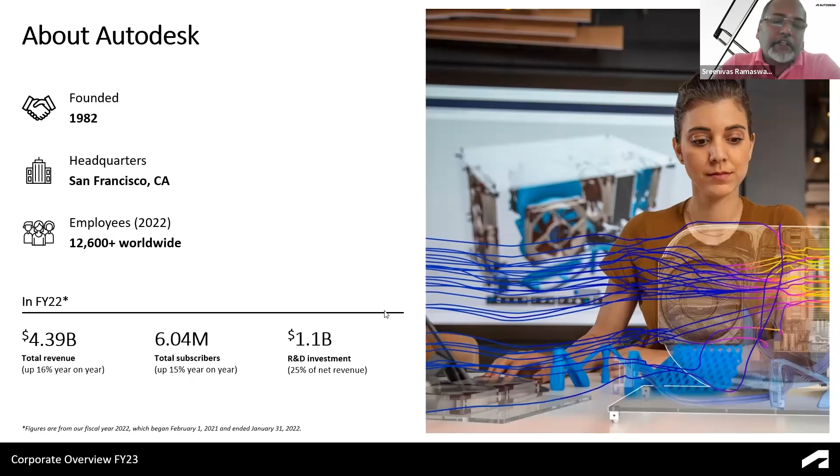Next slide. So we have the broadest, most comprehensive, best-in-class manufacturing solutions available today, and our customers are benefiting from the expertise. We have 700 software developers plus our expert technical consulting teams and growing specialized partner networks across the globe. We have invested more than $1 billion to build advanced manufacturing solutions. And we have 6 technology centers worldwide focused on advanced manufacturing innovation. Next slide, Sai.

Our network brings together industry, academic, and entrepreneurial communities to create a shared vision of the future of making. Autodesk provides these facilities, technology, training and expertise for these communities to explore ideas that will shape the future. We also invite customers to come and visit these technology centers and learn more about the future of making. Next slide.

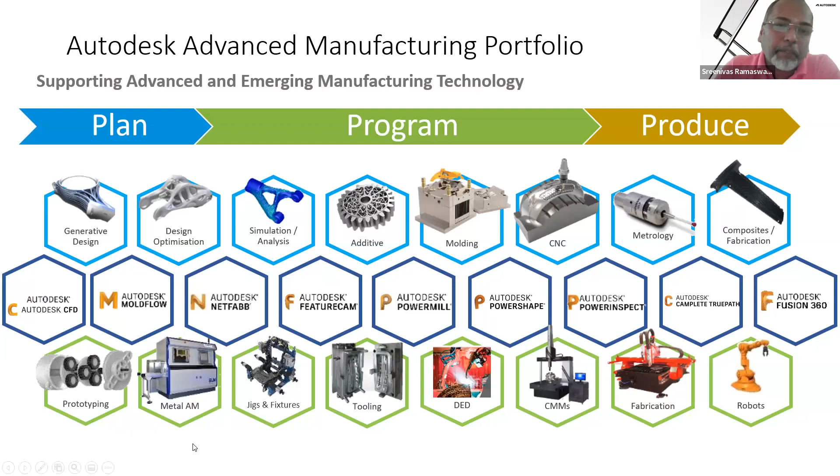Next slide. Thank you. Let's now look at the current manufacturing challenges faced by the industries, which will help to introspect what a manufacturer has to face in this fast changing environment. Due to the increased customer demands, the rate of new product introduction is skyrocketing. About 45% of them are delayed by at least 1 month. This is a study done by Gartner, and it's been put in the news. So 45% of the new products that come into market are delayed by at least 1 month.

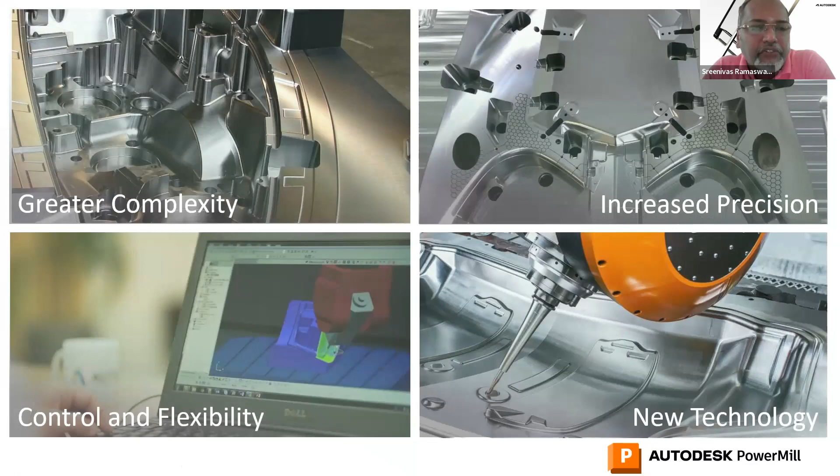Why is this so? Why is there a delay? So let's deep dive further and see how manufacturing is affecting this delay. Next slide, Sai. So what are the common challenges faced by the manufacturing industries, or at large as a manufacturer? What are the challenges that we face today?

Greater complexity. Suppliers of consumer goods strive to differentiate their products in a highly competitive marketplace. Consumers have grown to expect new and better parts more frequently, and end users expect products that are stylish, connected, desirable, life-enriching, customizable, reliable, convenient. And this places ever-increasing pressure on the capabilities of manufacturers to react and remain ahead on product designs. Parts cannot be half-made, and so CAM needs to provide tools to get the job done.

Increased precision. Customers' expectations regarding quality are higher than ever. Manufacturers need to maintain extreme levels of standards of quality and precision. Dimensional precision and surface finish are paramount nowadays. Manual polishing is not acceptable at all.

Control and flexibility. Manufacturers are under pressure to make every second count. Inefficient machining processes containing air cutting waste time and money and place additional pressure on delivery timelines. Component manufacturers need to be agile to react to design changes.

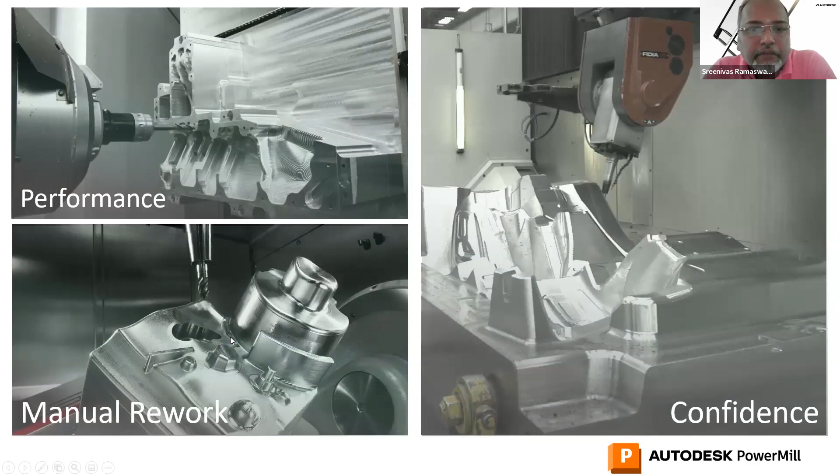Next slide, Sai. So the other common challenges that we face today are performance. Large complex parts take time to program, with pressure to start cutting chips as quickly as possible. Speed cannot be the only consideration. Speed and quality must go hand in hand. CAM software must provide the tools to shorten programming time without sacrificing quality.

Manual rework. Parts are both complex in nature and large in nature. So as a result, any rework is expensive and time consuming and will impact delivery timelines. Manual polishing is costly, inconsistent, and can destroy the precision of the required part.

And the last one that I want to talk about is confidence. Complex parts are inherently harder to manufacture. Manufacturers are under pressure to produce high quality, reliable NC code. Programming errors need to be found and resolved as early as possible in the process. Programming errors can be disastrous, resulting not only in huge damage to and rejection of parts, but also damage to the workpiece, fixturing, and the CNC machine as a whole. So it's a lot of downtime as well as cost to the manufacturing process.

All right. So I'll be talking a little bit about advanced manufacturing solutions. So for nearly 40 years, Autodesk has pushed the possibility of what it means to design and manufacture. So it's not just about design now, it's also about manufacturing. From subtractive, additive, simulation, materials, electronics, Autodesk has it all nowadays. Okay, so let's look at some of the solutions that can help to improve your existing workflow or improve your team's performance in general.

So first of all, let's look at Autodesk PowerMill. PowerMill is a powerful computer-aided manufacturing, or in short, CAM software that is specially designed for 5-axis machines and high-speed machines. This solution is considered the most advanced and complete software for machining complex and hard components, and is fully optimized for 5-axis and high-speed devices.

The main applications of PowerMill are the production of sharp and sensitive parts, such as die casting and molding. Of course, it can be used for others as well, but this is its stronghold. With the help of this solution, you can optimize the toolpaths and improve the surface quality of your components, all digitally, even before you start machining the real prototypes or parts. So you can do the verification all in the digital world.

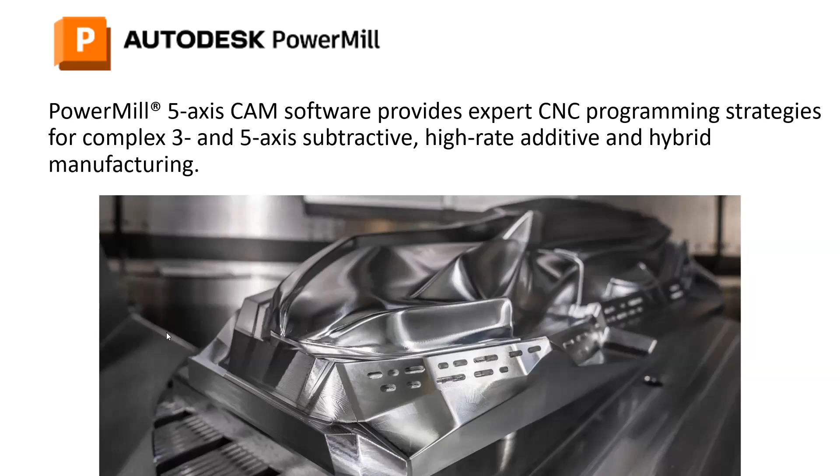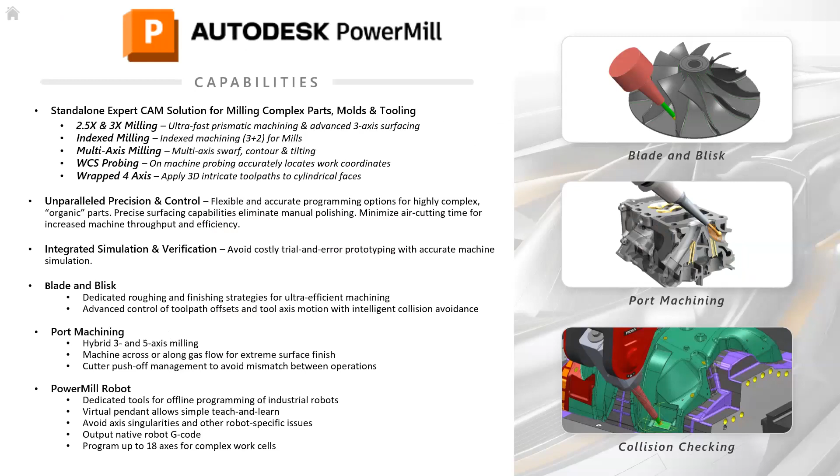All right, so a quick overview of what PowerMill can do. Basically, it's an expert CAM solution, very advanced 2.5 and 3-axis milling, unparalleled precision control, simulation and verification, port machining, and PowerMill robots. So you can even do robot simulations with PowerMill. Okay, let's see a bit more about PowerMill.

No matter whether the parts you manufacture are simple or complex, you probably need more than one machine setup, which can increase time to program the CAM portion. PowerMill gives you predictable behavior, increased automation, and greater flexibility in a familiar interface. When a setup is activated, any toolpaths will be shown automatically on the setup. Work planes are very accessible and user-friendly.

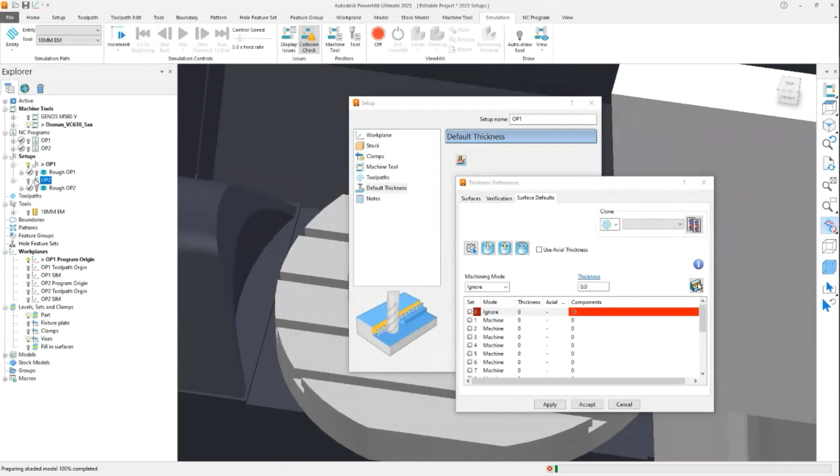We can also add machine tools on the spot for every setup now. You can see the work planes shown on the browser clearly, and you can control the work planes on the spot. Then let's look at things like machine tools. You can specify default thickness for every setup.

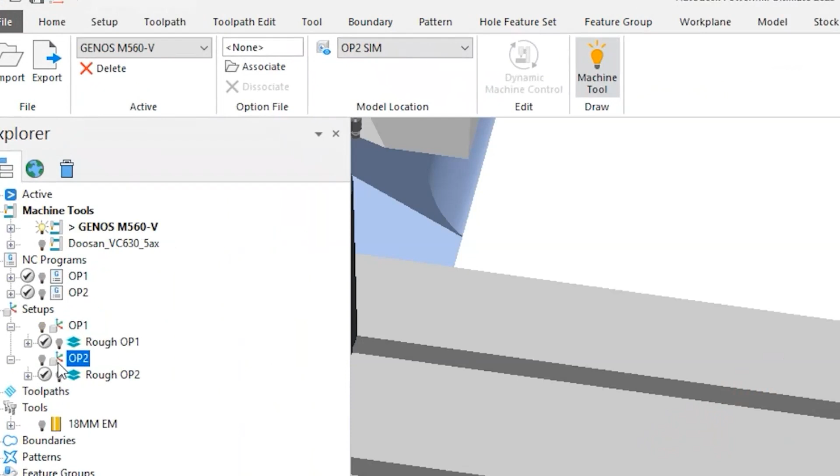And let's talk about the machine tool and model locations. You can assign a different machine tool and model location to each setup. This makes it easier to jump between setups. So with multiple setups, when you want to start to run the program, you can choose it from the dialog box.

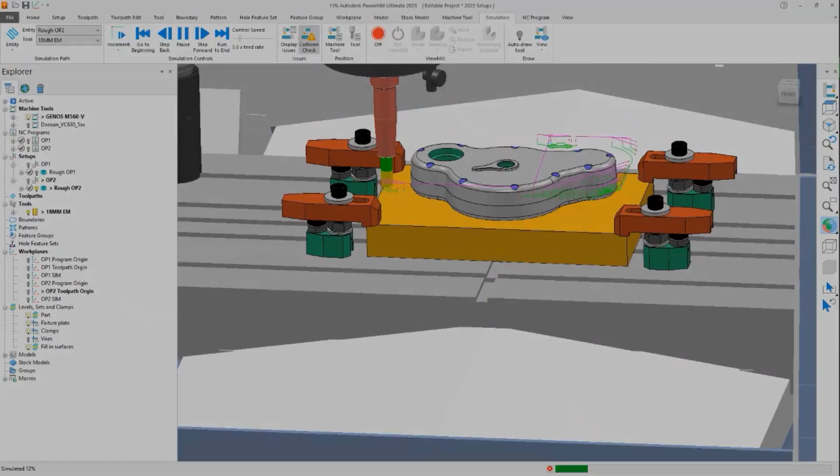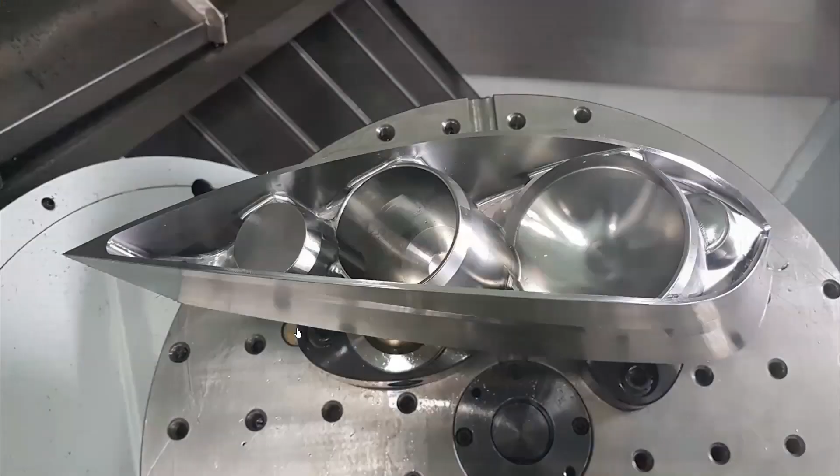So with this, your workflow for programming parts that require multiple setups can be shortened, automated, and simplified. It will help improve your team's performance and your product performance together. Now let's look at some examples. Here is an example of PowerMill with 5-axis. You can import a vise, or create your own vise and bring it into PowerMill.

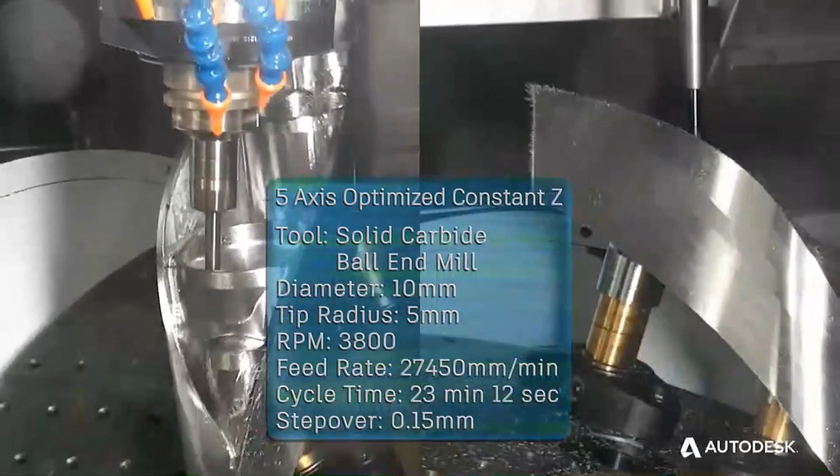Okay, so those are some example videos of how PowerMill helps to machine the product in real life. A quick quote from one of our customers, Paragon D&E: with PowerMill, we're seeing jobs come in weeks ahead of schedule. Builds that traditionally take 10 weeks, we're now doing within 4 to 5 weeks. So in this example, they save more or less half the time to create the programming and machining with PowerMill.

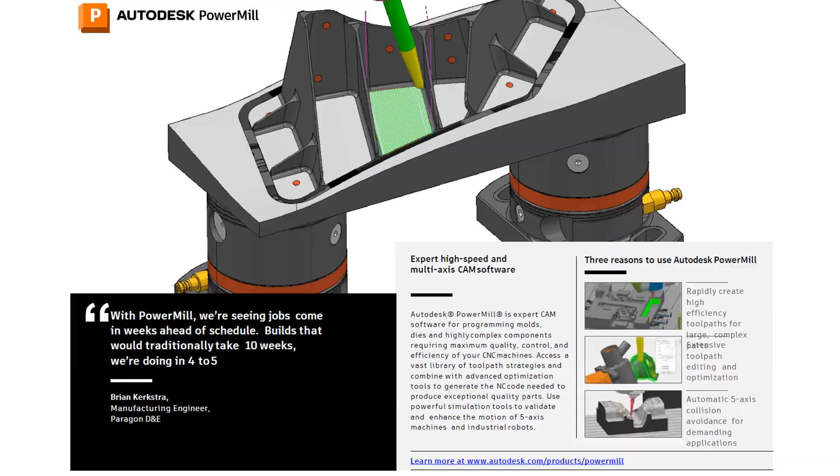Okay, so the three reasons why they use PowerMill: rapidly create high-efficiency toolpaths. And then of course the toolpaths can be edited. Not many solutions have this capability where you can edit the toolpath. And automatic 5-axis collision avoidance to make sure that there's no gouge or any tools hitting the parts or the machines. So next I'm going to share about Autodesk PowerShape.

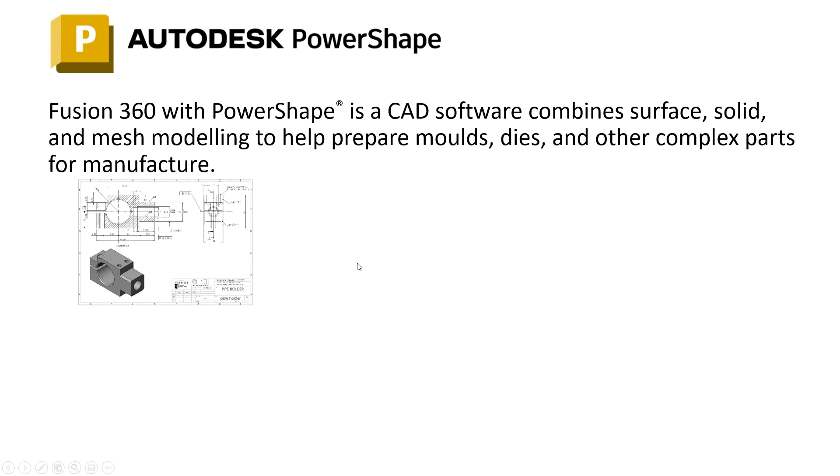PowerShape is an ideal modeling companion for CAM software such as PowerMill, which I shared with you earlier. Basically, it helps to create geometry to aid CAM programming, basically for modeling purposes. PowerShape can work with native CAD data, so it can open CAD data from almost all the mainstream design systems. Intelligent workflows help you to import, analyze, repair, and also prepare complex parts for CNC machining.

PowerShape is commonly used by manufacturers who receive a finished product design and need to convert it into manufacturable parts, often things like molds, tools, dies, and electrodes used for mass production. As you know, in a modeling environment you can model very complicated stuff, but is it manufacturable? So sometimes editing or adjustment is needed to make sure that the part is manufacturable.

Some of the key points of PowerShape: it can repair imported CAD data, so prepare third-party CAD models for manufacture. It can help find and repair common faults with ease with automatic wizards, and auto-detect issues or problems. Tolerant solid modeling: access solid modeling tools designed for real-world manufacturing problems. This helps to quickly make whole-model edits on imperfect data, and it will highlight where the issues or potential issues are.

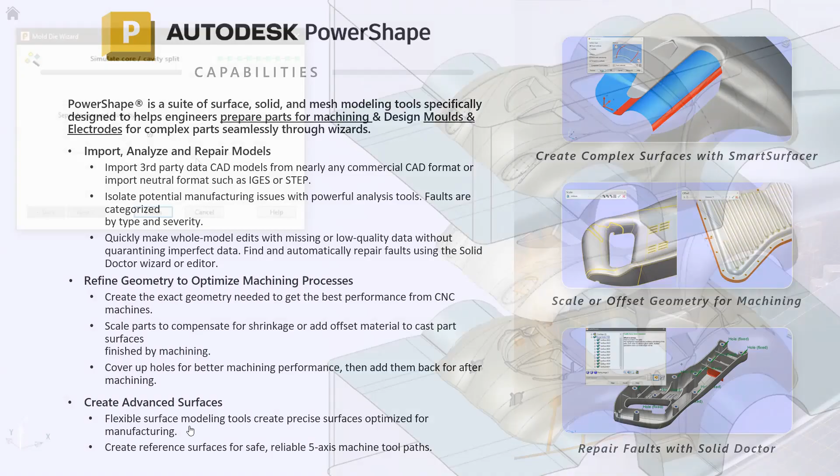Flexible surface modeling. Whenever we produce complex surface geometry, we always need to make sure that we are able to make precise edits to create manufacturing surfaces to our needs, to make sure that it relates back to our requirements and our standards. We can do this with PowerShape as well. So let's just look at some examples.

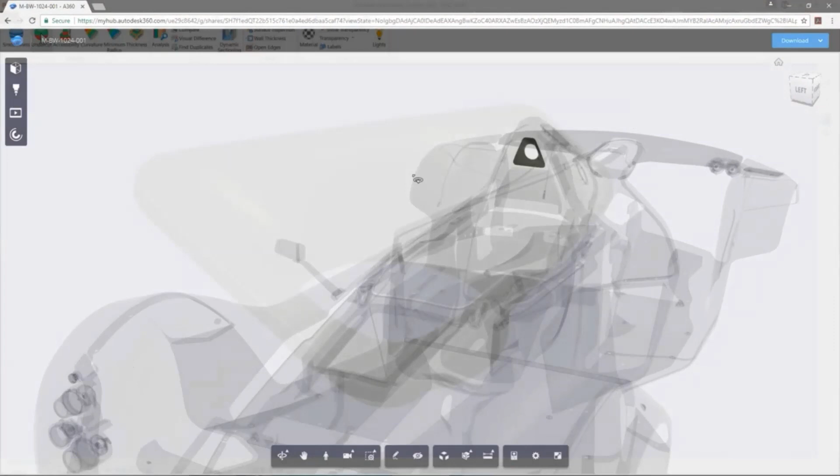PowerShape has a number of dedicated tools to assist with the creation of core and cavity blocks for use in the production of moulds and dies. The first step towards producing a moulded or cast part is to orient the component appropriately. Automotive parts, for example, are designed in car line, their true 3D position as they will be on the finished vehicle. For moulding, parts must be reoriented to allow the tool to open and close in a single direction, known as a line of draw.

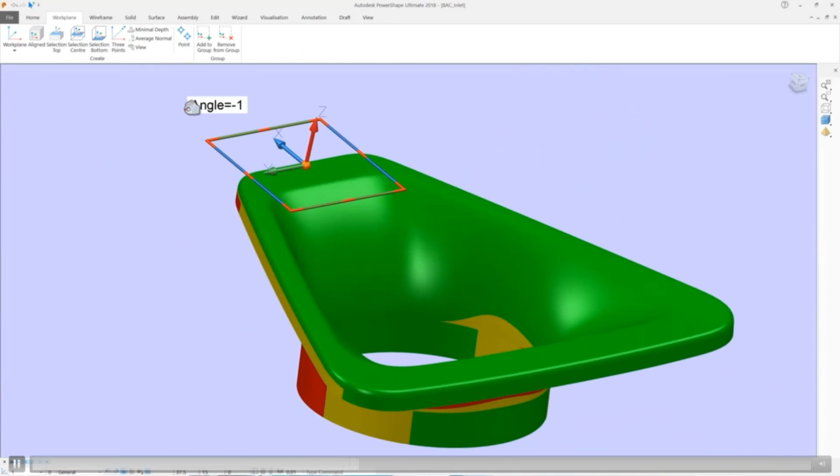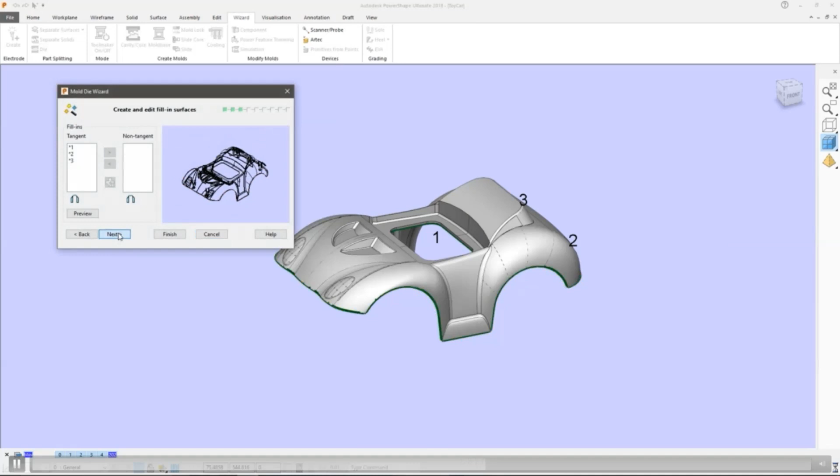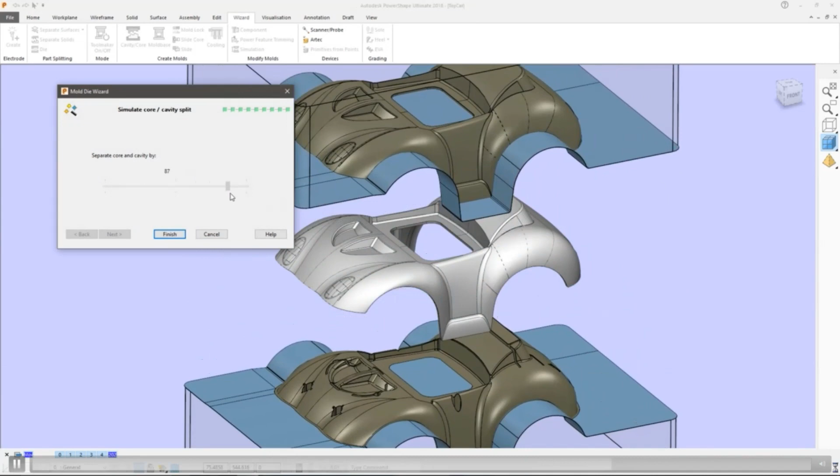PowerShape helps you find the optimum alignment quickly and easily. Use undercut shading to visualize any regions that cannot be moulded. If necessary, adjust the work plane until the undercut features are more easily accessed. For parts that can be moulded in a single line of draw, PowerShape uses a simple-to-follow die wizard. PowerShape automatically splits the part into cavity and core halves, but goes on to create all of the necessary split surfaces to ensure that the tool seals correctly. Die wizard is fast, powerful and extremely flexible. You can start with just the part to be moulded, or predefine split curves, shut-off surfaces, split surfaces, die blocks or any combination, and allow PowerShape to create the missing pieces of geometry.

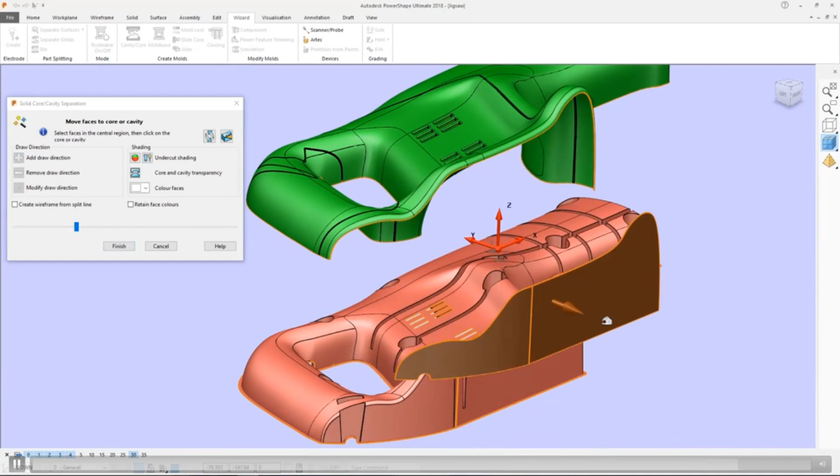Many real-world parts cannot be moulded in a single direction, but instead require complex mechanisms such as slides, lifters, collapsing cores and so on. The core cavity wizard in PowerShape divides a model into as many separate solids as you need. Simple dynamic sliders show you the tool action, helping you ensure that the finished tool will work exactly as you want it.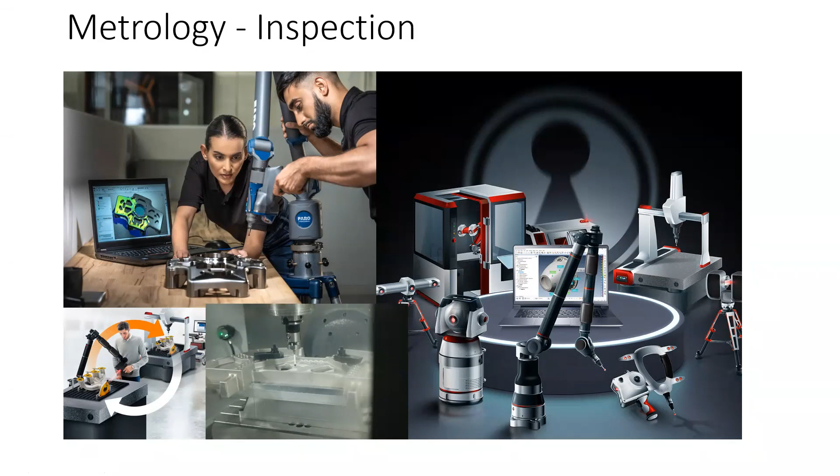All right, so that's on PowerShape. Let's look at something towards inspection, so metrology, the inspection portion of CAM or machining industries. Autodesk PowerInspect: measurement software that offers a powerful way to inspect, validate, and manage quality for all your measurement equipment. It works well with all the portable CMMs like Faro, Kreon, Romer, and a few more.

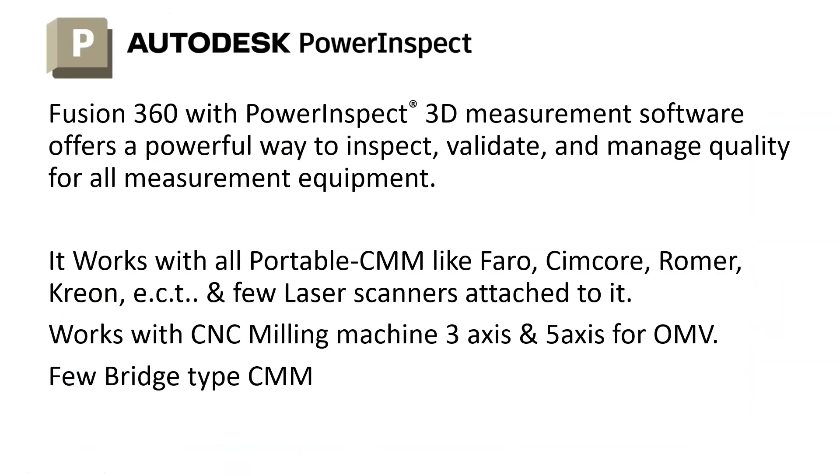Let's look at the capabilities in general. Complex shapes inspection: basically, this is the purpose of using PowerInspect. You want to inspect complex shapes, apply the best strategies for inspecting them, and automatically compile results into reports. Manufacturing integration: optimize your manufacturing with adaptive fixturing, OMV on-machine verification, electrode inspection, clay milling. 2D features from point clouds, where you can automatically fit 2D features from point cloud data and have greater confidence in the measurement results.

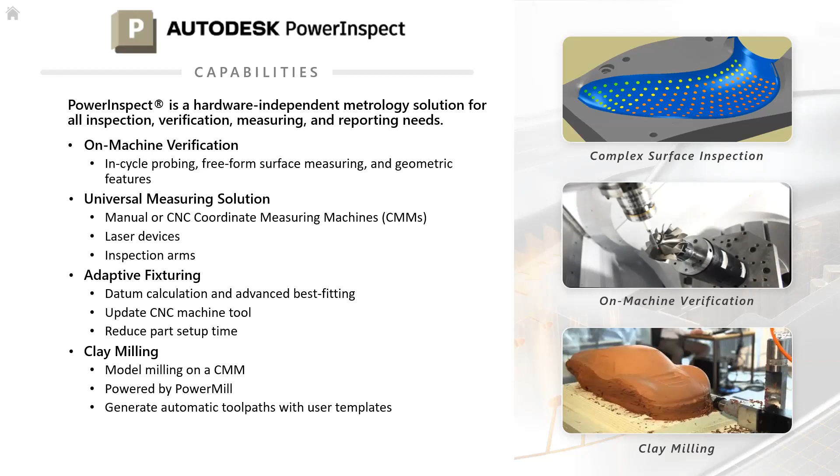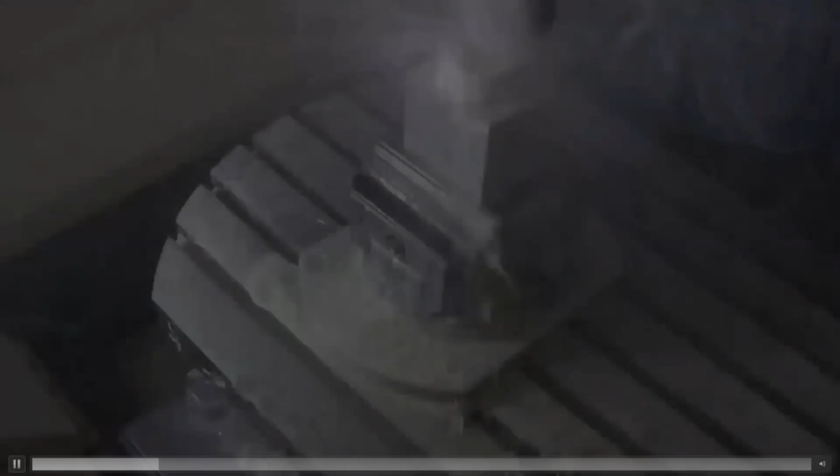Do you require adaptable metrology software capable of smoothly merging with and optimizing your existing workflow? At PowerInspect, we look to complement your overall manufacturing process, however you choose to do things. Our vision is not just for metrology, but to enhance each step of your workflow.

We all understand that time is cost, and so PowerInspect has been built with numerous features and tools that aid in drastically improving the efficiency of your practice, whatever the scale of your project. One of these is a deeply developed alignment tool.

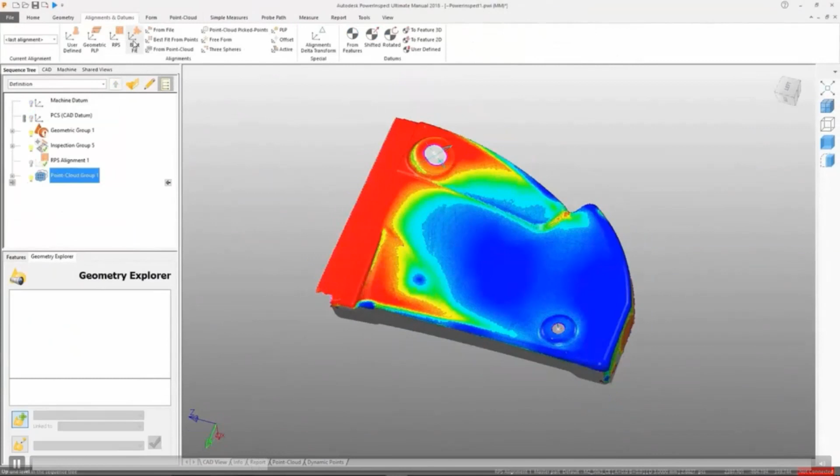This tool consists of a wide array of different alignment methods, making it flexible enough to apply to almost any situation. In particular, PowerInspect's powerful best fit functions allow you to refine your alignment even further, leading to much swifter and more precise overall inspection.

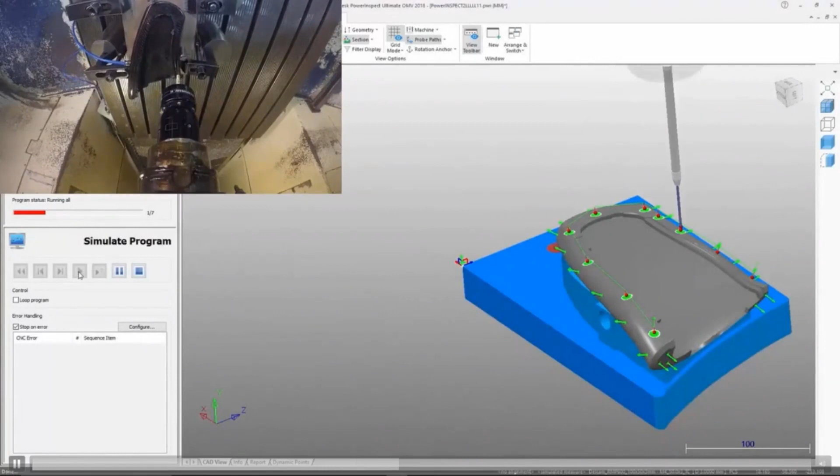PowerInspect also makes small adjustments as it measures, updating future procedures based on the results it obtains. With this feature, named Adaptive Manufacture, inspection can become an integral part of your machining process. With each and every measurement, subsequent toolpaths automatically update and further inspection sequences are modified, leading to unparalleled accuracy at all stages of manufacture.

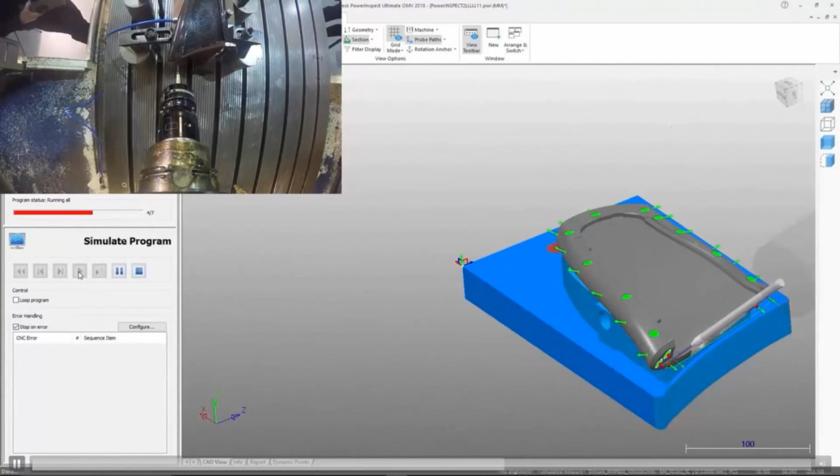But this accuracy could be impaired by any machine you use in your manufacturing procedure. How exactly can you be sure that your machine tool is accurate? PowerInspect can be used to analyze your machines, to ensure they operate exactly the way you want, qualifying any areas of uncertainty before they become a problem.

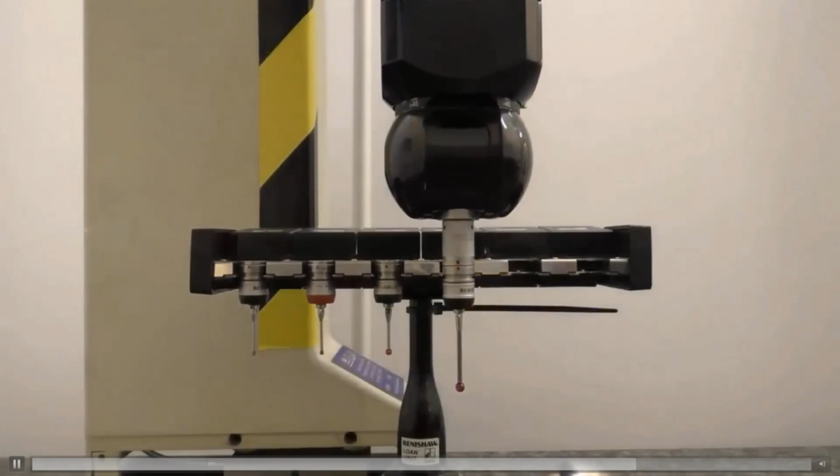At Autodesk, we have a broad range of expertise in a wide array of industries. This experience has proven useful in the construction of our solutions, including PowerInspect. One such industry is electrode manufacture. In an area such as this, where an incredible amount of precision is required, PowerInspect is unrivaled in its prowess. Its peerless ability to measure during each step of the process allows you to compensate for any inaccuracies without excessive expense.

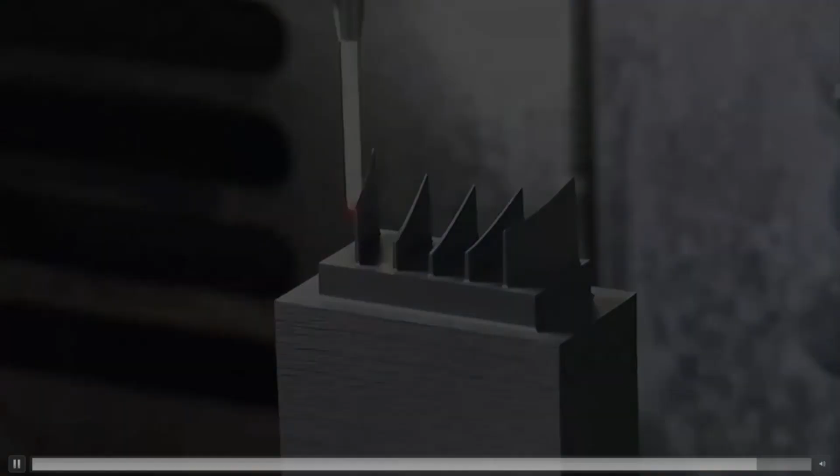No matter what type of engineering you do, PowerInspect can be easily integrated with your workflow, majorly enhancing your manufacturing process.

Okay, so is everyone still okay? All right, so let me just proceed a little bit, not much from my side.

Okay, let's talk about FeatureCam. FeatureCam is a multi-axis turn mill CAM software for 2D, 3D milling and also turning, so mainly used for turn mill.

Let's look at the capabilities of FeatureCam. Basically, it supports a wide variety of machines in job shop environments, including 2.5 to 3-axis milling, indexed milling, turning, EDM, water jets, and laser cuts.

Automated CAM programming with standardized best practice basically helps to program parts faster, because they reduce programming time using automated CAM. This is basically automated CAM, so it has a very good feature called feature recognition, where it's used to scan, identify, and create machinable features from your design.

Comprehensive machine support - can program mills, lathes, turn mills, Swiss lathe, EDMs, and more.

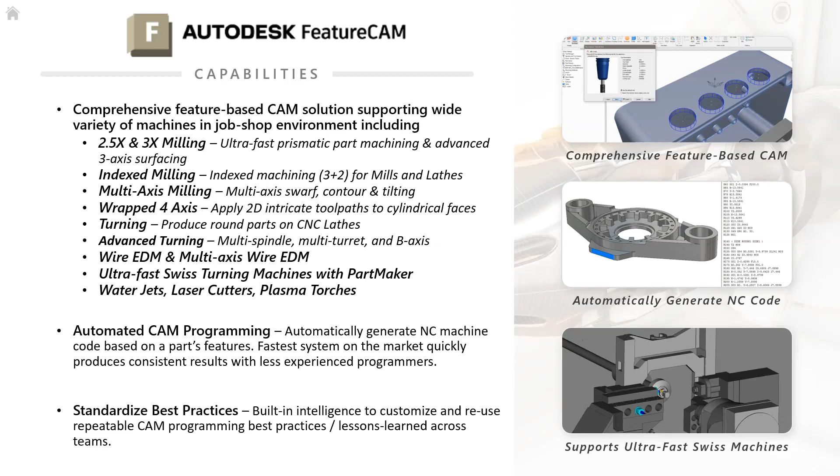So some examples of how people use it - FeatureCam has been a blessing. From the design, they can get the G-code, and it goes into the machine in a very fast, very short time.

So the three main capabilities highlighted are: automate your workflow from design to NC, so this process is shortened; a single interface for all the CNC applications; and consistent results with built-in manufacturing knowledge.

Fusion also can help in terms of collaboration, where it can help do file management, or if you want to share or collaborate with external parties, you can do that, and all the communication can be stored within Fusion 360.

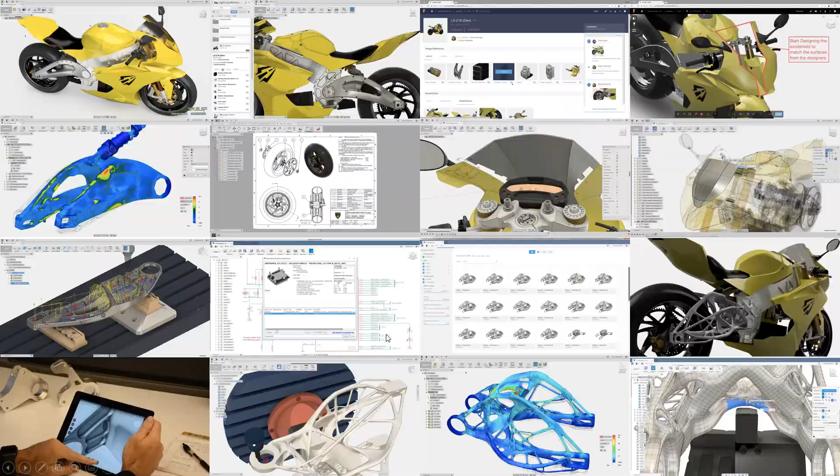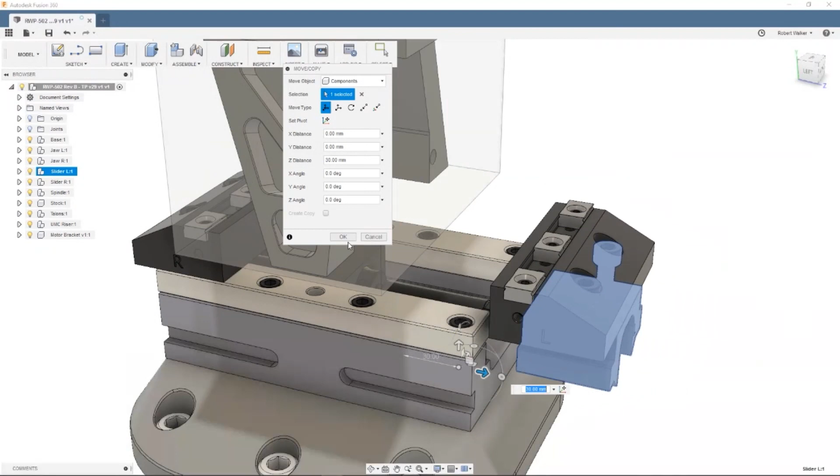With all the powerful assembly and modeling within Fusion, it can be used to establish machining fixtures, and can be fed downstream to PowerMill for machine programming. Any changes to the original SolidWorks file will be immediately reflected in the Fusion file.

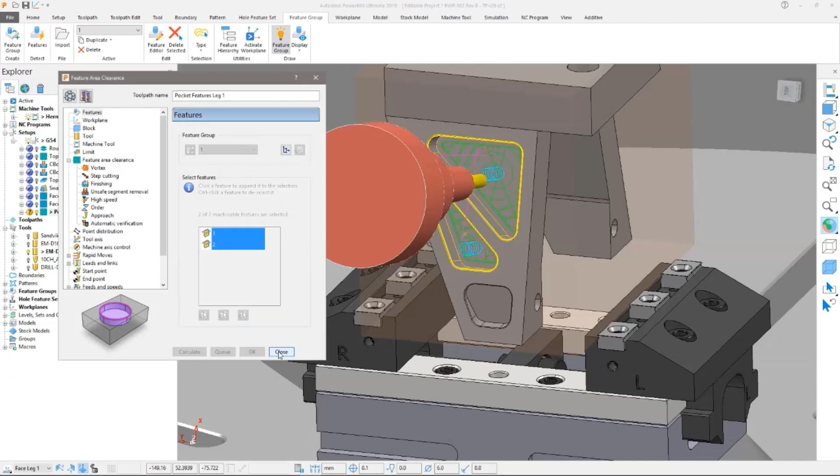And then it can be subsequently passed down to manufacturing, to PowerMill for example. So basically, if there are any updates or changes within SolidWorks, like here you can see some fillets added, with just one button click it automatically updates in Fusion.

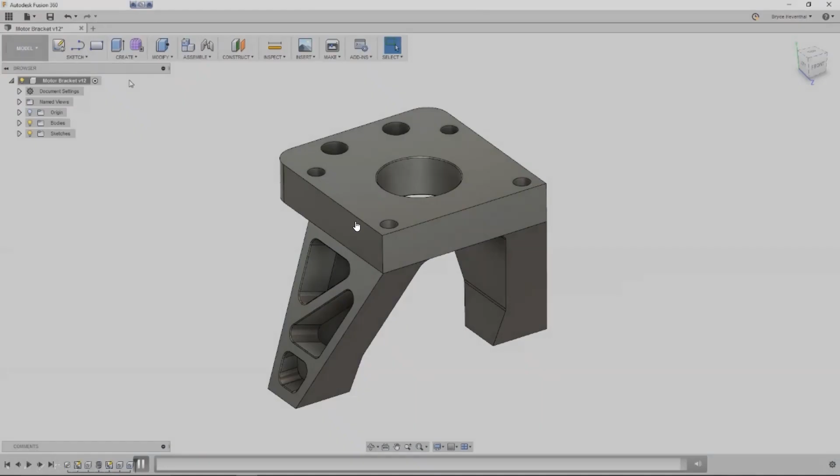All right, so let's say now I'm in PowerMill, and there are some collisions discovered. You can find out there are collisions with the machines or with the tools, and we can do some collaboration or markups within the Fusion team environment.

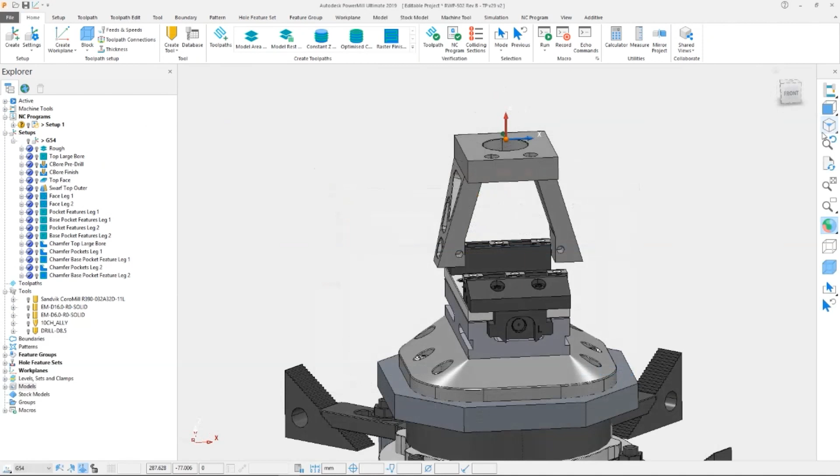This is all in Fusion, and you can do some markups, give some comments. You can document the comment on the right-hand side, and you can see communication is there. So when the file was sent to Fusion or opened up in Fusion, we can make the amendment or adjustment, and then send back, or maybe open it back with PowerMill and straight do the machine program.

So you can see it's re-imported into PowerMill, and simulated in PowerMill to show that everything is well. This is where the collaboration capability of Fusion really helps.

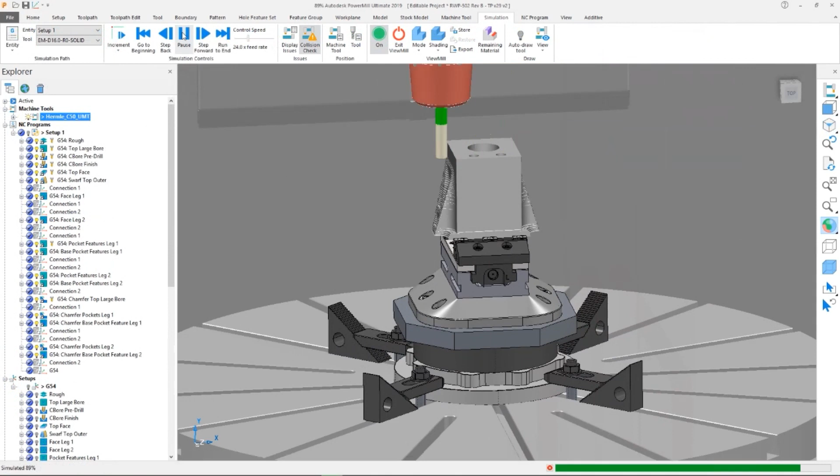All right, so next one, another example here. Part design created in PowerShape can also be exported to Fusion. Using Fusion simulation capabilities, the design can be so-called verified.

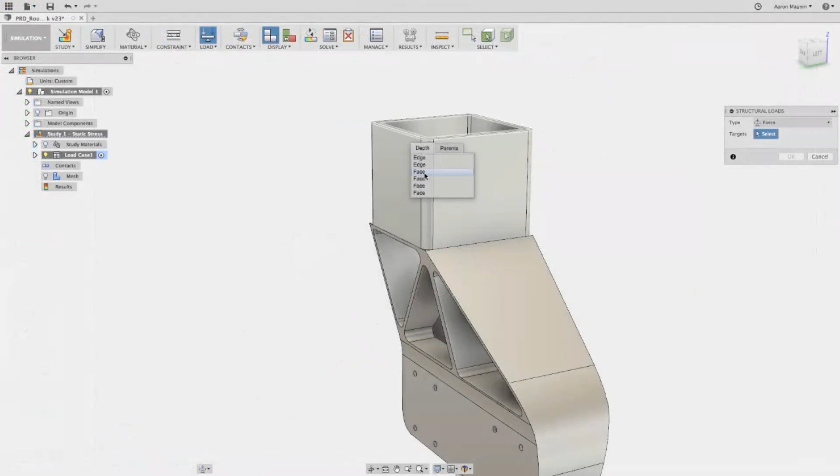In this example, we can create multiple materials, and see which material is stronger or strong enough to withstand the real life forces that we apply, in real life situations.

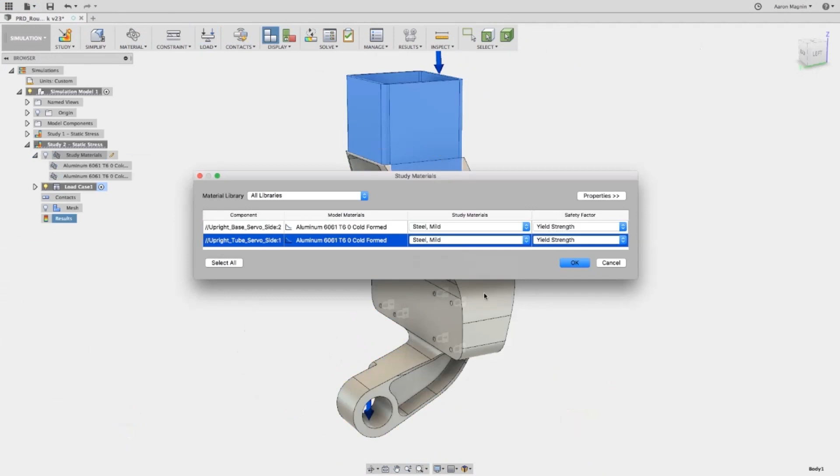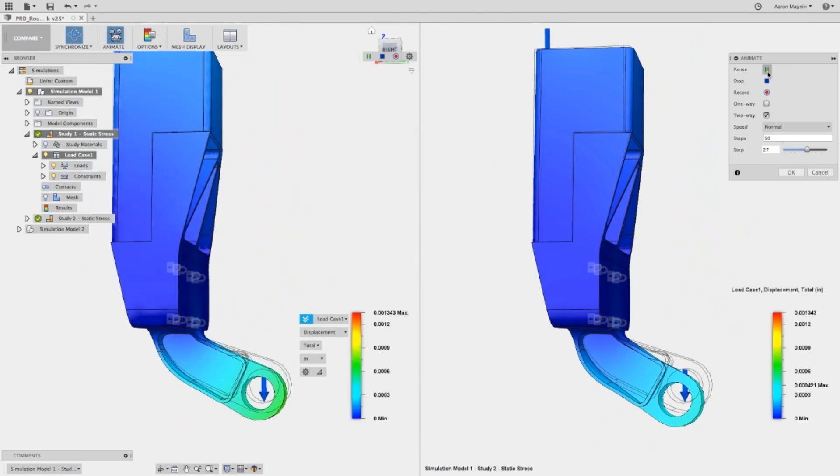So in this case, we created this with mild steel, and then we can just run the simulation. We can probably set different thickness or different material of the parts, and validate whether it's strong enough or not. I can see where the critical areas are, where the critical point of that part is. So this is all done before we go to machining.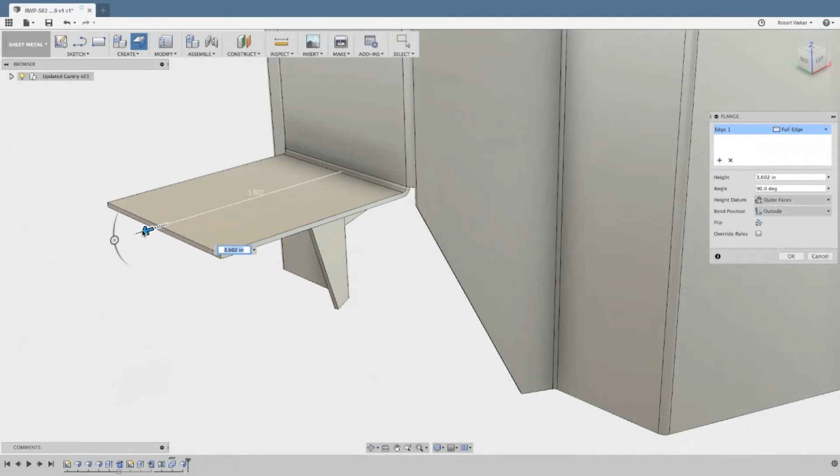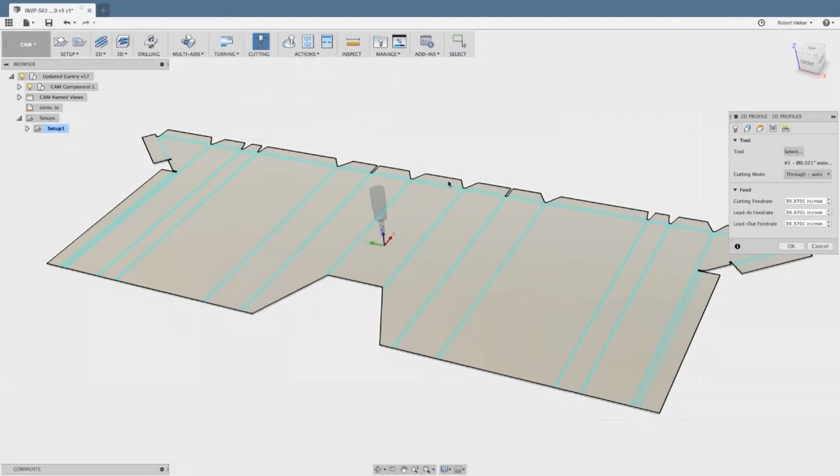And then another capability here within Fusion is sheet metal design and also nesting. This adds more strength towards the PowerMill package, where Fusion can help in terms of sheet metal design and nesting. As you can see here in Fusion, it's very simple to create sheet metal with a simple drag to the desired length, and you can create working drawings, and also create a simple nesting and cutting within Fusion.

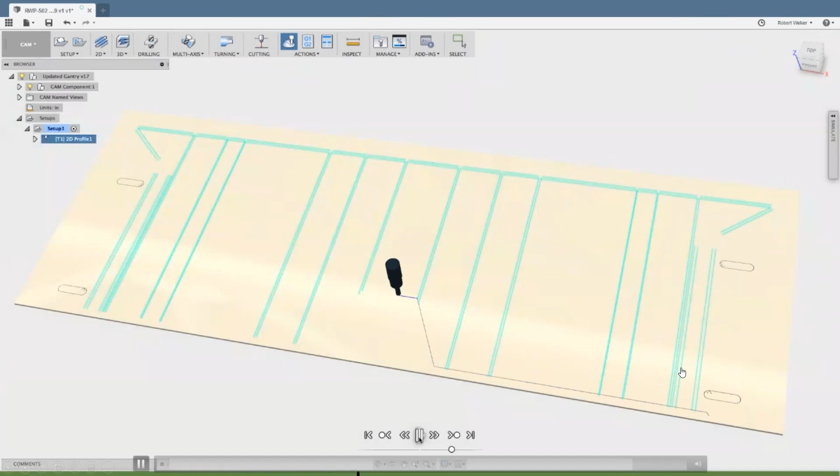So this all adds more benefit, more strength to the advanced manufacturing package, especially the PowerMill package. So that's done my part here. I'm going to pass to the next presenter, Srivatsan. Charles, do you want to run the poll?

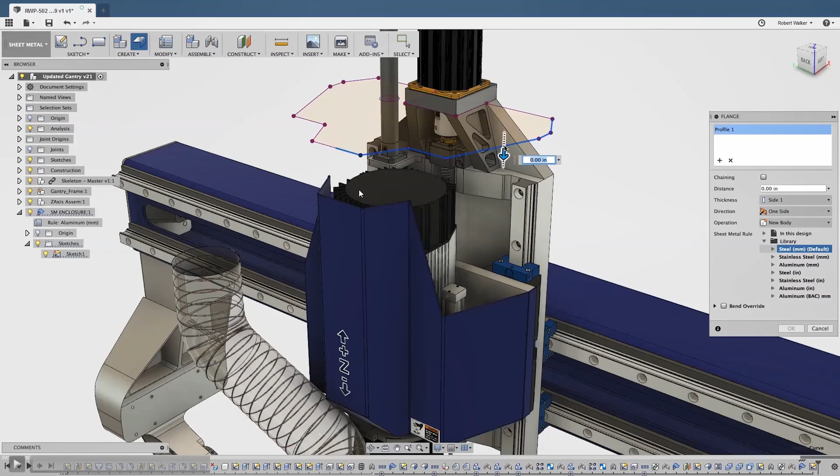Okay, so thank you, Charles, and also to Syed and Srini and Marcus for the previous presentations. Good afternoon to everyone here. My name is Srivatsan, and I am from Autodesk Singapore. My role is to bring these technologies with the help of partners like Marcus and I-VTech to our customers around the ASEAN region. They are creators, innovators, manufacturers around this region, working on several different products and innovations, like 3D printing, subtractive — all these people will have different needs.

And I work with these partners to bring our technology to ensure that they are able to achieve their business goals. So far we have seen some of the technologies that Autodesk have in the advanced manufacturing space, and Syed has also shown some of the software capabilities. We didn't deep dive into it, we didn't want to bore you guys. We just wanted to give a quick introduction about the capabilities of this product.

So you have also seen that we have invested $1 billion in this technology, and over $1 billion in acquiring a lot more advanced manufacturing technology to provide a complete solution. But what use is all of this if you're not able to achieve results and give our customers what they want? The great thing is we have been doing this for four decades, and we have had some immense successes around the globe.

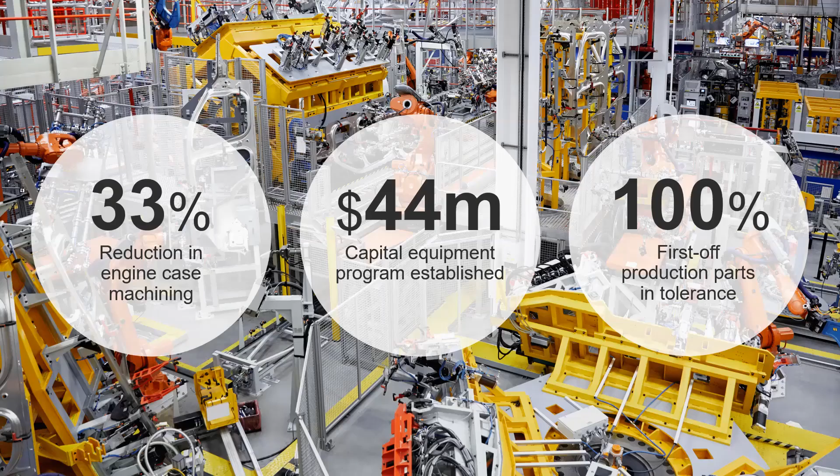Okay, so firstly, this is a customer - they are a large automotive OEM customer based out of North America. And they had a goal to build an agile workforce following a business transformation in their organization, which caused a reduction in workforce. So what they wanted to achieve is to be able to make products faster and not let this reduction in workforce affect their throughput.

So we partnered with this OEM from America, and we helped them to standardize and automate their processes across multiple facilities in North America. And the outcomes speak for themselves. We managed to reduce 33% of the machining time, from 60 minutes to machine an engine casing down to just 40 minutes. And this is through the CNC feature recognition that Syed spoke about, which is part of FeatureCam, where you don't have to pick out all the holes - the software will just do it for you.

And because of these improvements in the manufacturing process, the company invested $44 million in acquiring new equipment to reduce inefficiencies and limitations. And not only that, they were able to reduce part inspection time from 5 days to just an hour. Imagine that - 5 days down to just an hour. All this is by putting our technologies in each of the processes, from design, manufacturing, to inspection.

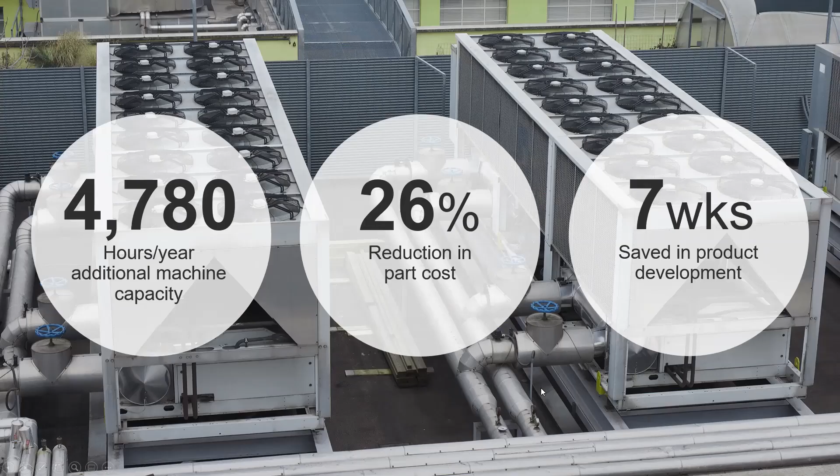Okay, another case is there's this company called Trane Technologies, who are in the HVAC and refrigeration sector. So they design and material. They wanted Autodesk to support them in terms of design, material processes, molding, and machining. And through our partnership, we managed to achieve these things: 4,780 hours per year of additional machining capabilities. Like we said, reducing the unwanted work, automating process, we managed to achieve this.

And also 26% in part cost. If you have less scrap, if you use less materials, that's going to have a huge impact at the end of the year. And for them, it's 26% reduction in part cost and 7 weeks of reduction in product development process. If you're able to bring your product into the market much earlier, then you're able to reap the benefits, get the ROI much quicker. And our partnership with Trane has enabled them to do that.

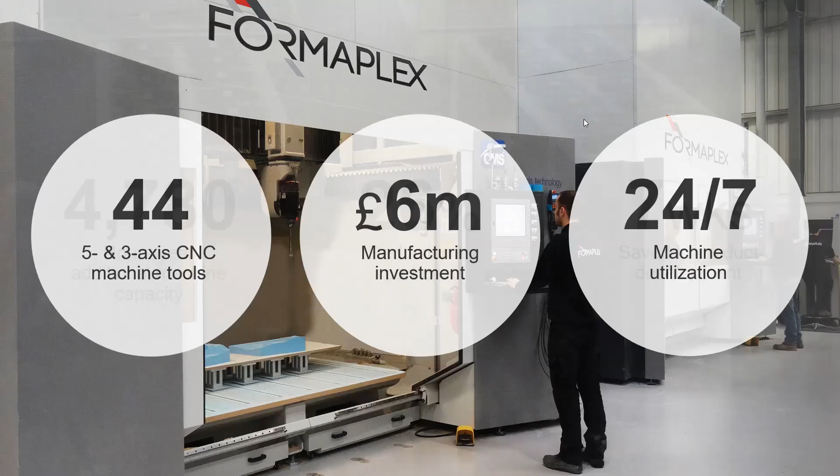And the next one is Formaplex, who is a UK-based company. They have 4 sites across the UK and 400 workers, and 44 CNC machines. They are a tier 1 supplier for global blue chip customers. They're doing injection molding, composite tooling, thermoplastics, components for automotive, aerospace, defense, and even Formula One. So they were actually looking to increase their throughput and efficiency to provide greater capability and scalability within their new facilities. So they expanded their facility and they were looking for these changes.

So what they did is they standardized with Autodesk solutions across the process. Like all the solutions that we talk about, instead of mixing and matching with outside vendors and things like that, they managed to standardize everything. And as a result, they managed to increase the operational efficiency by 30%. And they also maximized the £6 million manufacturing investment that they have made by higher machining efficiency and faster and connected workflow. What you get by standardizing across the Autodesk platform is having that efficiency and a connected workflow that takes away wastage of time of converting files, data loss, and things like that.

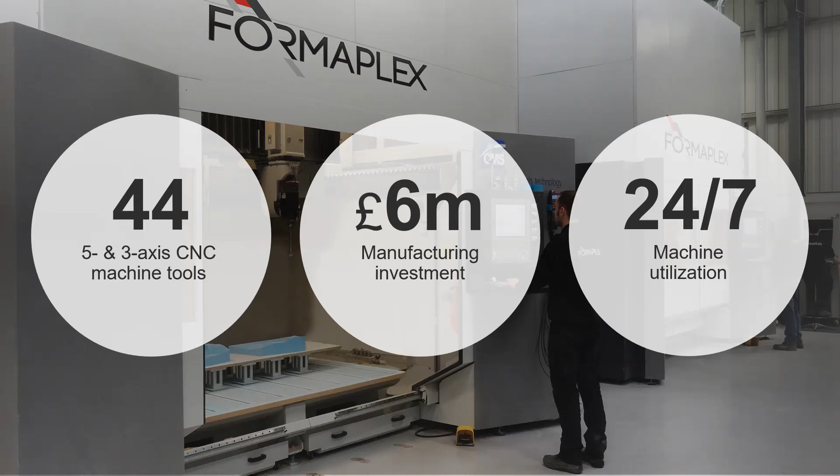And very importantly, they managed to utilize the machine 24/7. I know for business owners who have invested in new machines, this is the holy grail of machine utilization, a machine that runs 24/7. So they have managed to achieve that, and we are very happy to help them achieve that. And next one, please, Syed.

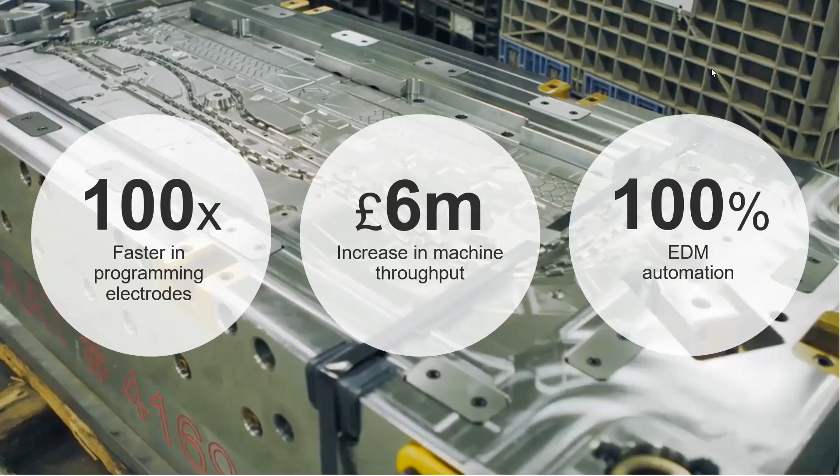And finally, this is Quest Industries. They are based in Michigan in the US, and they are a tier 1 supplier for OEMs, and they wanted to double the size of the business, completely digitalize their process, and reduce the reliance on supply chain. Especially with COVID and the war in Ukraine, we have seen a lot of disruptions to supply chains, both locally and globally. So how did we help them achieve this?

So we achieved this by helping them to transition their end-to-end EDM process from multiple vendors to a single Autodesk toolset. And what was the outcome? They can program their electrodes 100 times faster, increase their machine capacity by £6 million, and completely automate their EDM process. And there's also less reliance on outside suppliers because they're able to increase their capacity and do a lot more jobs by themselves. So we have gone through 4 different business outcomes. And next slide, please, Syed.

Okay, so the reason why I've shown you these things is we want to show you that we don't just say that we have this technology. We actually want to show that we have managed to achieve our customers' goals and business outcome goals. And we can do the same for you as well. Just looking through our audience list, I can see business owners, programmers, machine operators, and even students in there. So I know that each of you will have different goals.